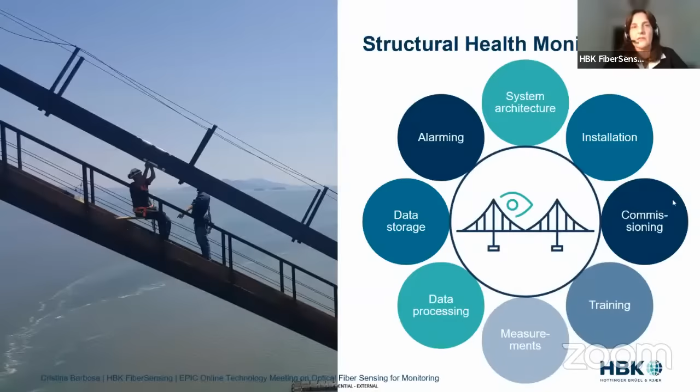So the experience and the portfolio of HBK within all the technologies allow us to cover all these topics in terms of structural health monitoring. And for this, I would like to show you some examples of application.

So starting with an example that is not that recent, it's already from 2017, but nevertheless, this is an important and iconic structure because of its type. So it's a bridge, it's a very old bridge. The whole process and the need for the monitoring system is interesting because they were refurbishing and replacing some of the structural elements of the bridge. So there was the need to monitor its behavior.

So basically the most important part of this rehabilitation process was replacing all the eyebars, which basically are the cables that hang the structure deck. And as they had to be dismounted, all the loads had to be transferred to a short-in-time structure, so a structure just to hold the deck while the works were being done. And all these strain transfers and load transfers had to be controlled real time during that operations. So it was an interesting project in that way.

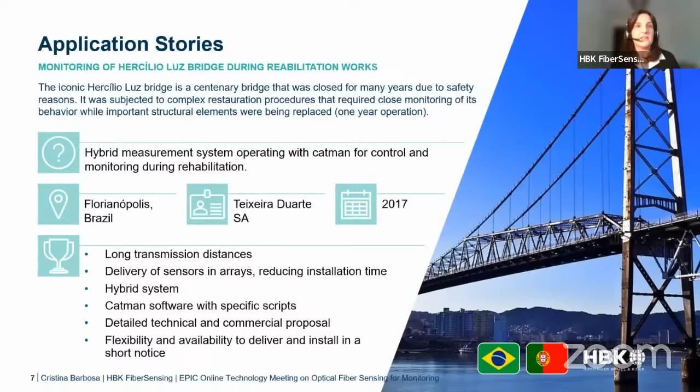And another thing that made this interesting was the fact that this was a hybrid system, meaning that we had the optical sensors based on fiber Bragg grating technology, but also some conventional sensors that completed our solution. Okay, the reason for going to optical technology was the fact that we can attain long distances, and also the installation time was very important.

Another interesting example is a bridge in Venice, a bridge from Calatrava. And here also the optical technology was chosen because of the installation and the fact that HBK could provide the full solution. And last but not least, an example of pipeline, so a penstock that would be filled with water, and that for optical technology is not an issue. So the monitoring of this penstock with strain sensors was also performed by HBK, because we were able to offer the full complete solution, and then also the installation service as well.

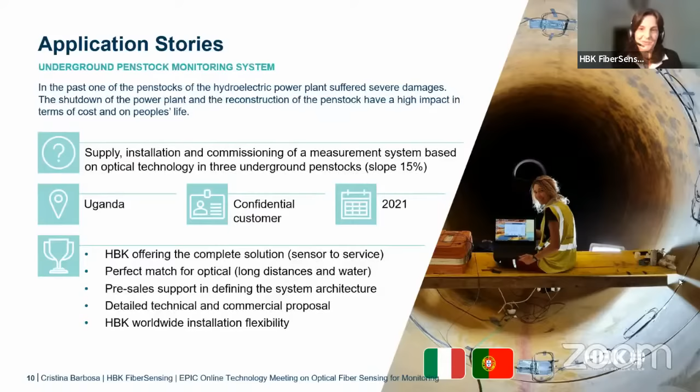So these were the examples and the words I wanted to share with you about HBK FiberSensing and HBK in general. We can go now to the questions.

Thank you very much for your presentation, Cristina. Really interesting to see all your applications. Six minutes is challenging. Yeah, it's really short. I know. Let's go to the questions. That will make it interesting. Yeah. So, do we have any question from the participants? I saw a hand.

Yes, please. Hello, Bolesław Bąk, Sumitomo. I would like to ask you about the number of sensors, strain sensors, which you used in several projects, which you described just right now. What is the scope of these sensors? How many you have used, and what type of interrogator you have used?

Okay, so the number of sensors, of course, depends from project to project. On these that I showed, I had to speed up because of the time. But on the bridge, on Hercílio Luz Bridge, we had almost 300 sensors, strain and temperature. If you are familiar with the technology, the fiber Bragg grating technology requires temperature compensation. So most of the times we use this pair, strain and temperature sensor. On the Uganda penstock, so this was in Uganda, I didn't mention that while talking, but we had more than 84 weldable sensors, also strain and temperature, the same thing.

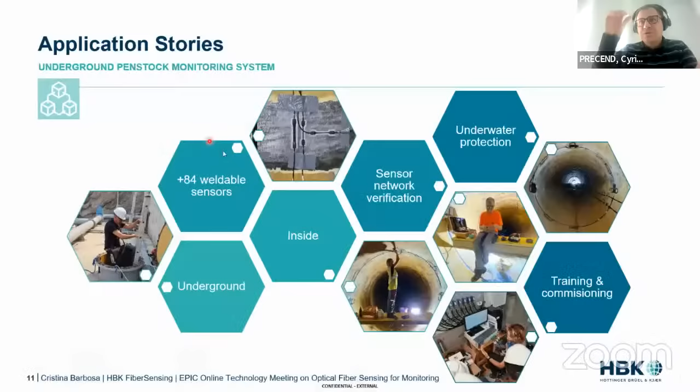So strain are the ones where you see, I don't know if I have a pointer. We don't see your screen, Cristina. You don't? Ah, no, okay. Sorry, I thought you were seeing that. Thank you. Yeah, it's okay.

So these are two strain sensors, and this is one temperature. So groups of three. This is to give an idea in terms of quantity of sensors per project. We are talking about hundreds of sensors. Your other question was on what type of interrogator was used as a device which collects the data from the sensors? Okay. On all these projects, we are using HBK interrogators, FS22 interrogators, depending on the measurement with static or with dynamic acquisition rates.

Okay, thank you very much, Sumitomo, for your question. We have another question from OptiWave, Ahmad Ati. Hi, nice presentation. Question is about what you called the strain sensor. So what's the difference between the strain sensor and another sensor, which is, let's say, mounted on a bridge or something?

On our portfolio, we have many different types of sensors for measuring temperature, for measuring displacement, for measuring load, for measuring vibration, tilt. So those are the types of measurements that we can, okay. So what's the characteristic for the strain sensor? What is it mainly used for, the strain sensor?

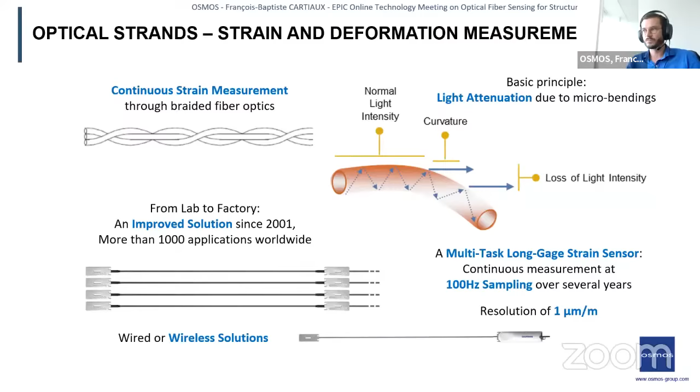Because here we speak about photonics, so the principle of the optical strand, which is our optical fiber sensor, is unlike FBGs or other techniques. We use the modulation of the light intensity in the fiber, and for that we have to amplify the loss of light intensity into the fiber, which usually is not the aim of fiber optics. And so for that we use braided fiber optics. You see a very schematic view here. And every curvature will induce some light attenuation that depends on the tension on the braided fiber, and so on the tension in the material on which the sensor is set. So this is used since more than 20 years on several applications, and we will see one example later.

Here is all the data flow that is managed by OSMOS, so from all the sensors, including the optical fiber ones, through our data logger, either a wired solution or wireless. We also have wireless options for our optical fiber sensors. And all of this goes through internet network to the OSMOS cloud and is available for our customer, both on the web interface for a human user or through API routes for other database interfacing with other systems.

We are also active in the research field of structural health monitoring. Here are a few examples of partnerships with universities. We have four theses, and the main goal of all this research is to know what to do with the data, to turn the data into knowledge. So we are on the engineering level: once we have all the measurements, how can we conclude about the structure?

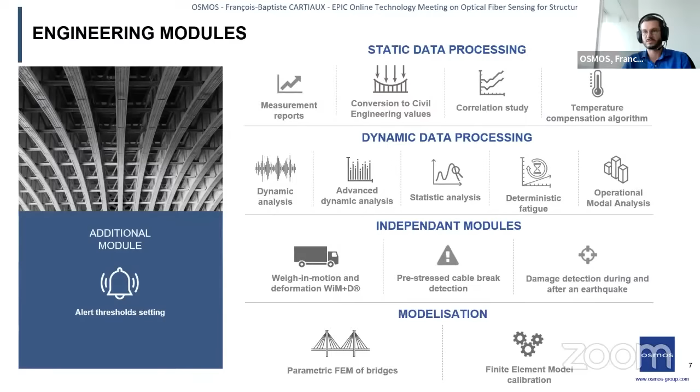Some modules that we use are already available commercially to draw conclusions from the data. Here you see dynamic analysis. Weigh-in-motion is interesting on bridges, so we can deduce the characteristics of trucks driving over bridges from the response of the bridge that we record with our optical fiber sensor. Also everything from vibration analysis, system identification, and so on. And we can also perform model updating when necessary.

Here's my application, so it's only on one slide. We have this example with a reservoir on an industrial site in southern France. It's monitored with 30 optical strands at different critical locations, over the whole height and in two different directions. So we have both the circumferential strain and the vertical strain at different locations.

This is continuously monitored with measurements basically every 10 minutes. And in case of rapid vibration, it's automatically switched to 100 points every second in order to record vibrations of the shell of this reservoir.

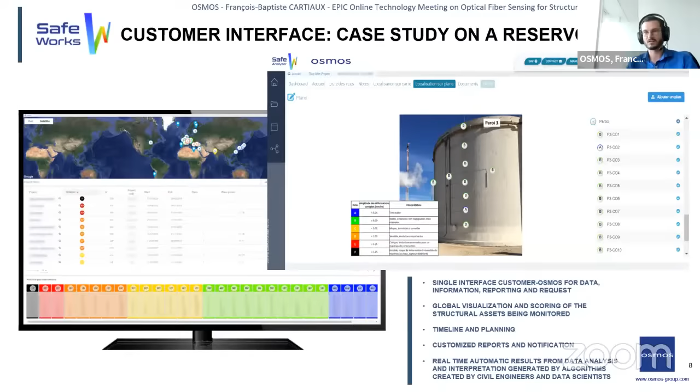I have no time to go into detail, but all the measurements are processed to get this synthetic stability index that we make available to our customer, with a scale from A to F, very easy to understand. The main purpose is to have anticipated assessment. If we see one part of the structure going from A to B to C, it's like an anticipated alert system. We don't speak about alerts because these are very small phenomena at that time, but it's a way to have the kinetics of the evolution of the stability of the assets.

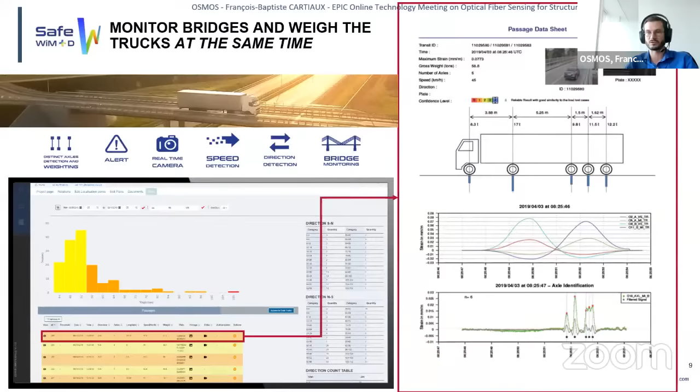Here is a short illustration of another application, very operational, which is weigh-in-motion for bridges. Imagine all of these results for every truck over the bridge, obtained from the response of the bridge measured by the optical strands. And these are our key references. I let you read this last slide, and I am available to answer your questions.

Thank you very much. Sorry, I'm the bad guy. No, I think that's six minutes. It's okay. Perfect. Thank you very much. So we have already one question from Sumitomo, please.

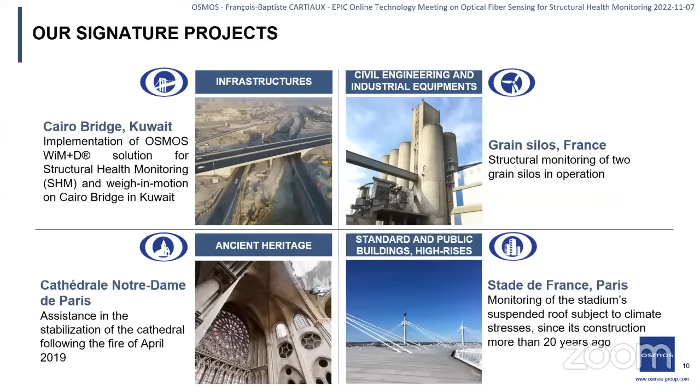Hello. I would like to ask about the details of how the sensors need to be installed on the steel structure. And second, is the sensor itself different from fiber Bragg grating sensors? Yes, I will begin with the second question. You understood correctly. The principle we use is totally different. We don't use the frequency shift due to the gratings of the fiber Bragg grating moving farther or nearer to each other. Here we have classical fiber optics, not prepared with gratings. It's purely the classical fiber optics that you can use for communication.

But we manufacture them by braiding them, and this braiding of the fiber optic allows us to use the light intensity as the indicator for the strain, the elongation of the fiber, and not a shift in frequency or backscattering and other techniques that also exist. The idea of this principle is to have a very light optoelectronic system behind, so our interrogators are not that expensive.

The first question was about the setup and installation. For steel structures, it's very easy. We can install them with magnets, so there's no drilling, because it's totally neutral to magnetic fields. It's easy to install and also easy to uninstall. For concrete structures, we usually drill; it can be a bit different. There is a gluing option: we have qualified a specific glue for a good interface with the material. Thank you for your question.

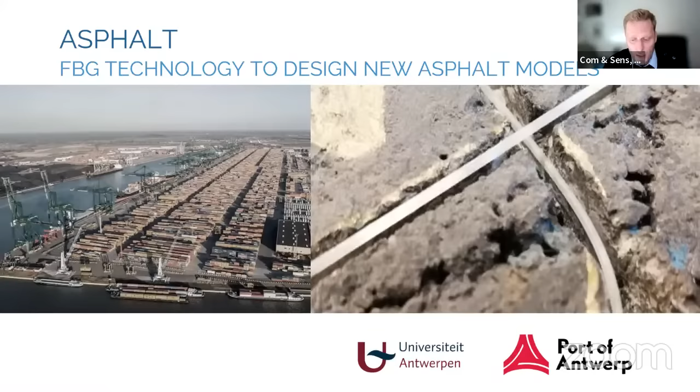So the roads and asphalt pavement at this location are suffering, not a bit, but really a lot. Road deformation is really a big topic, and lifetime extension of existing roads is a big topic. And on the right side, you see a close-up of our composite reinforced sensing tape in asphalt layers, where we install our strip technology into the road pavement.

And we can install the sensors for embedding into the asphalt with different methodologies. They can be placed on geogrids, grooved in existing asphalt layers, or placed together with geogrids. And you see a schematic of a sensor configuration with the road here and the direction of the road, where the trucks, we are mainly dealing with trucks here, the 2 wheels will ride over the different sensor configurations.

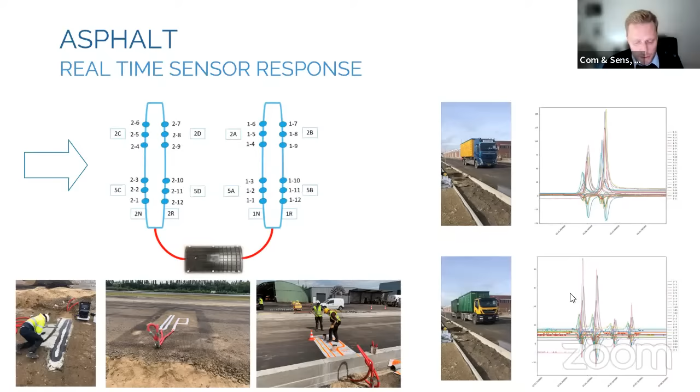If you look at the raw, real-time sensor response with just 2 axles, one single truck, or a truck with a trailer, you see obviously different sensor responses. And based on that, we can go really far into analytics and data processing. When we clean the data and it is processed, we can go really fine into the comprehension of the behavior and the different incidents occurring on the asphalt pavement.

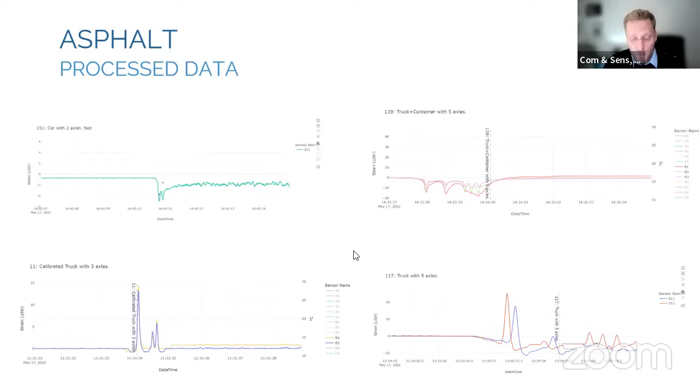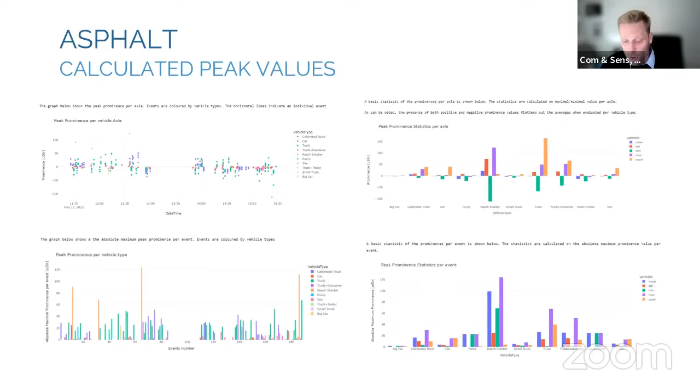So again, the sensors are embedded in the asphalt layers. We can identify a car with just 2 axles. We can identify trucks and containers with different axles, and so on. So really go far in the comprehension of what is happening above the road deck. And then you can run algorithms to define the values you are looking for in terms of analytics, and go really far into understanding the utilization and the deformation of different road pavements. That is one of the projects.

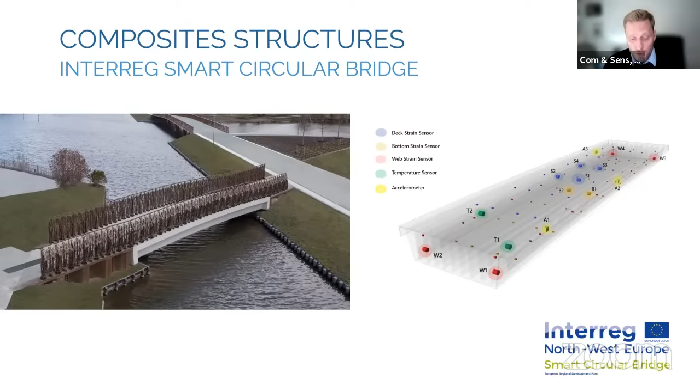Another project, still in embedding expertise into the material: a composite bridge, more precisely a bio composite bridge, based on flax fibers and bioresins, within our collaborative research project in the Netherlands, where we installed the first bridges. One of the features of embedding fiber sensors during production is that we can already give new insights and data for different stakeholders, such as process parameters for the producers, by reading out the sensors during the process.

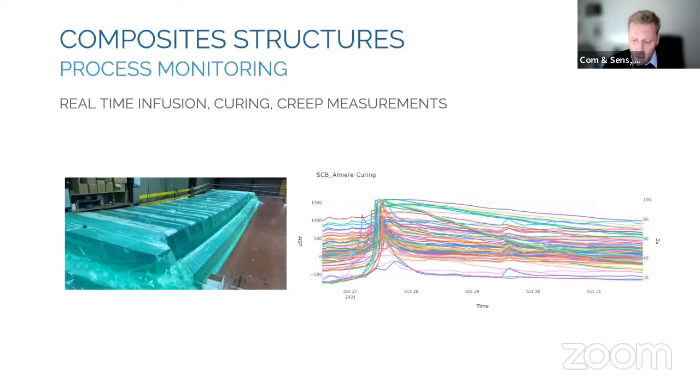You see a plot here of curing, monitoring the different strain and temperature sensors embedded in the material during the curing process of the composite bridge, giving more insights for the producers and providing, in fact, a digital quality fingerprint of the production leaving the factory. Afterwards, using the same set of embedded sensors, you can validate the parameters that you took for the design.

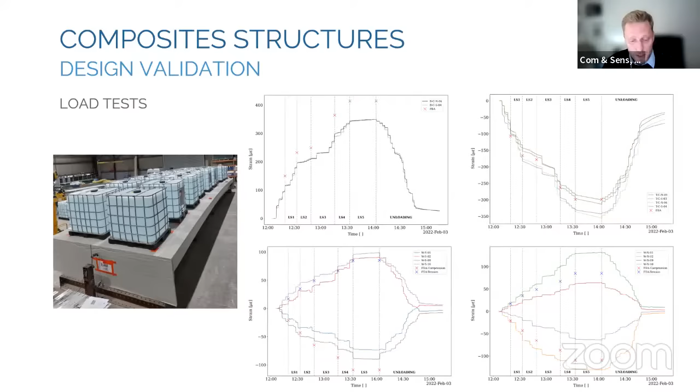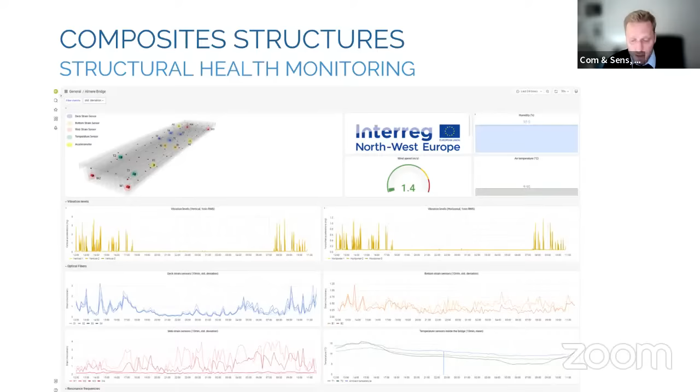Here we are talking about biocomposites, so new materials, trying to understand their behavior, and already using the sensor data for validating your parameters during a factory acceptance test or load test in this case. And then obviously using the same set of sensors for structural health monitoring. This is a print screen of a plotting tool for this bridge, where you can dive into different sensor responses and into more analytics of the usage of the bridge.

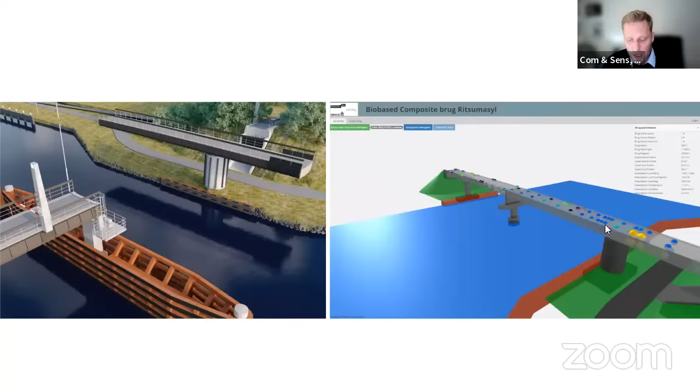This is another print screen of another bridge we did, also a biocomposite bridge, but this one is movable, with more than 200 FBG sensors embedded into the material. And you get here a print screen of the dashboarding, where you see live the values of the strain and temperature sensors. And this is what Com&Sens does.

The scope of Com&Sens goes from understanding the needs of the customer, why we need to monitor the structures, up to engineering the sensor configuration, installing the sensors and data acquisition hardware, and all the data handling from acquisition, management, transfer, processing, analyzing, up to providing dashboards from the live structures. It is my short pitch from Com&Sens, and we believe Com&Sens makes sense.

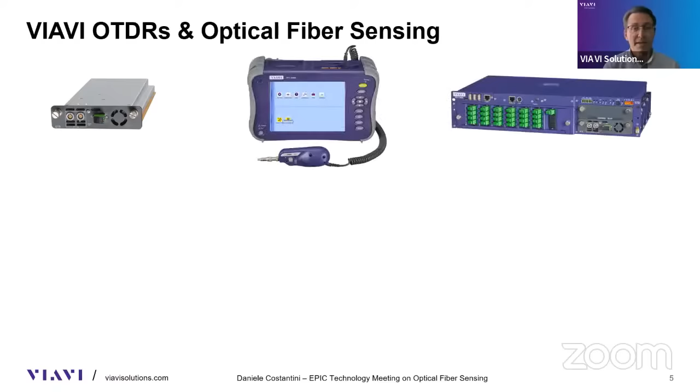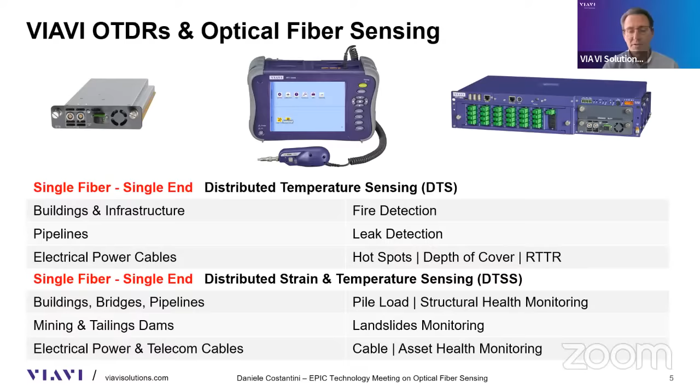All our OTDRs are very modular in nature, so each optical engine or fiber test head is made to fit handheld instruments or rack mountable platforms. And this modularity is very appreciated because it gives flexibility in the design of sensing solutions, going from fire detection in smart infrastructure all the way to health monitoring of telecom cable assets, which is the topic of today's talk.

So maybe one first message is that normal standard OTDRs used nowadays in the telecom space are not able to pick up this specific data. So Brillouin OTDR is the perfect tool for picking up and assessing the health of the cable itself.

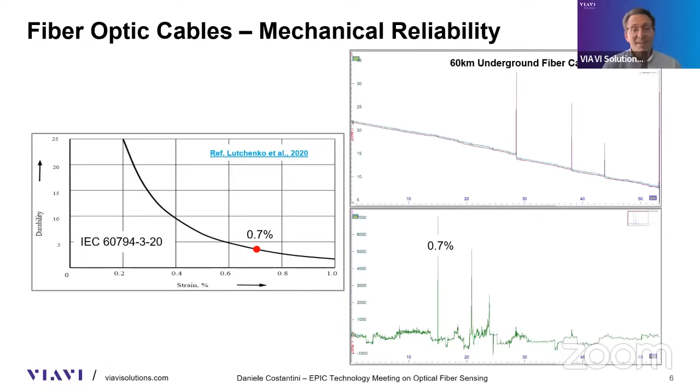For this specific cable, 0.7% we measured means that at that point, we had more than 7,000 microstrain of strain. And as you can see from the model of Lutchenko, for that cable, we could expect a lifetime lower than 5 years. So first message was, okay, we need a BOTDR to assess the health or the quality of the installation of the cables on the network.

Second question is, which BOTDR? Or what are the characteristics that are key for BOTDRs to do a good job? And so ideally, the good BOTDR for this topic is one that is able to decorrelate or measure at the same time strain and temperature.

On the graph here, we see traces that we have been taking on a 60 kilometers underground line, 6 measurements over 6 consecutive days at 24 hours of distance from each other. And if we are not able to decorrelate or get the temperature compensated strain measurement, we end up with a question: is this just strain, or what are the effects of temperature?

So our Brillouin OTDR is able to measure both strain and temperature by accessing one single fiber on a single end, and it doesn't need specific cables. And this is typically the situation on optical networks that are not made for sensing, but are made for data transmission. So the BOTDR that we offer here is able to measure at the same time strain and temperature using a single fiber.

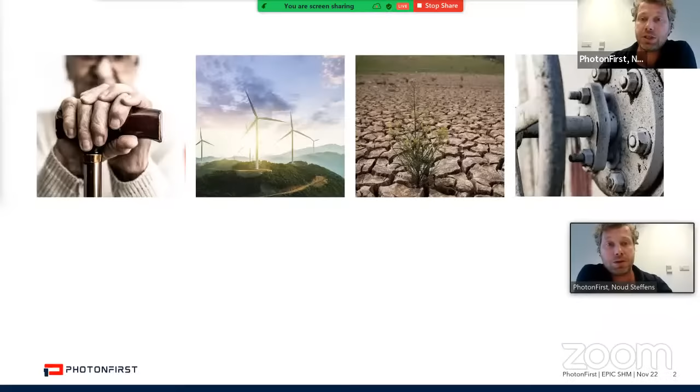My name is Noud and I'm responsible for the development of the energy and infrastructures market at Photonfirst. I'm going to present today why further integration of optical components is critical for the use of fiber optic sensing at scale, which we believe is required for a safe and sustainable future. In an increasingly complex world, we identified 4 macro trends. We see an increasing aging population, the amount of people available is reducing and knowledge is disappearing. This drives the need for automation.

Second, the energy transition. It's important that we get the maximum out of our energy production and energy network. Third, climate change and sustainability. This drives the need for better use of our resources and more robust assets. And finally, there's a huge amount of aging assets, and the expected amount of work for maintenance and replacement of assets is higher than we can currently execute in the coming years. Therefore, careful planning is required.

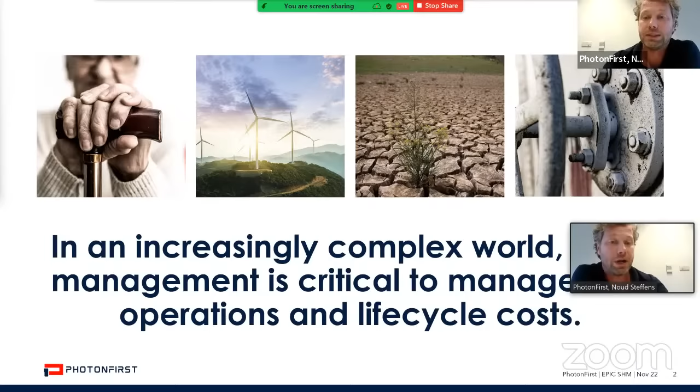Next to these macro trends, we see a few technology drivers. 3 important trends are enabling the monitoring of assets at scale. First, computational power and AI. This allows for better and faster decision-making from complex data. Second, connectivity: fast data transmission from all corners of the world. And finally, more advanced sensing solutions. This enables higher quality data from the assets that we want to monitor.

Of course, it's all about making informed decisions along the life cycle of the asset, and we need to make decisions about the design, maintenance, and end of life of assets. It is important to realize that most of the cost, about 2/3, goes to maintenance and end of life. So actually the biggest part goes to the operational part of assets, and information about this part is not widely available yet. And this is where we need to make the most critical decisions in the coming years.

To enable better decision-making along the life cycle, we need to address 2 important aspects: the quality of the data, driven by new and advanced sensing technologies, and second, smarter decisions supported by new, potentially AI-based algorithms. At Photonfirst, we focus on the quality of data. Photonfirst develops advanced integrated photonic sensing solutions that allow for use at scale. So we aim to provide high quality data with integrated photonics sensing solutions to enable smarter decision-making at scale.

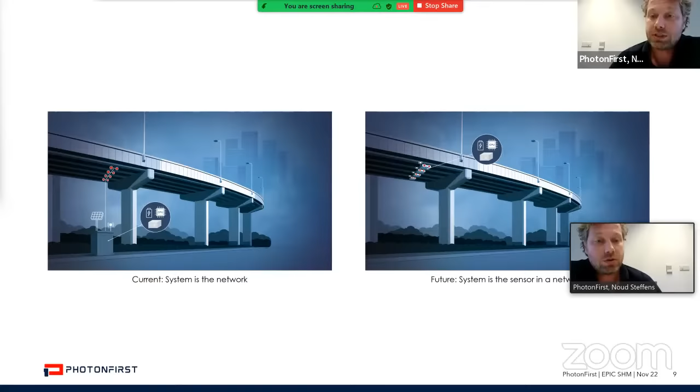This, of course, is very much application specific and the exact use will differ per application. What we aim for is the adoption of fiber optic sensing at scale. So currently with conventional technologies, we do it like this. And in the future, we aim at increasing the reach of fiber optic sensing over, for example, the Netherlands.

Concluding, there's a need for more advanced sensing solutions with better monitoring to reduce the total cost of ownership during the life cycle of an asset. Integrated photonics will push technology progression and will allow for further cost reduction, simplifications and widespread use of advanced sensing solutions. Main drivers to increase acceptance are application-specific solutions with maximum flexibility and minimal installation times.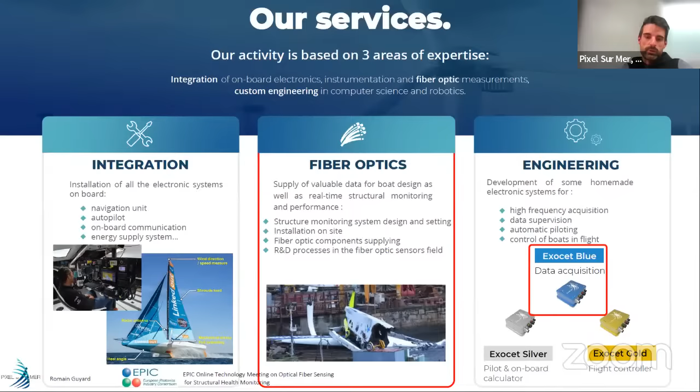And I work for the third business unit, related to structural health monitoring applications with fiber optic technologies. Our duties are to design, to decide which features of sensor we want to install on site, and to supply fiber optic components as well, like optical fiber patch cords or sensor connectors, and we have a few R&D activities as well.

And we equip essentially sailboats, but not only. I can show you a few of them: for the America's Cup, for the Maxi Ultime, or IMOCA boats. Why SHM? Why structural health monitoring? There are a lot of applications, but I can show you four of them.

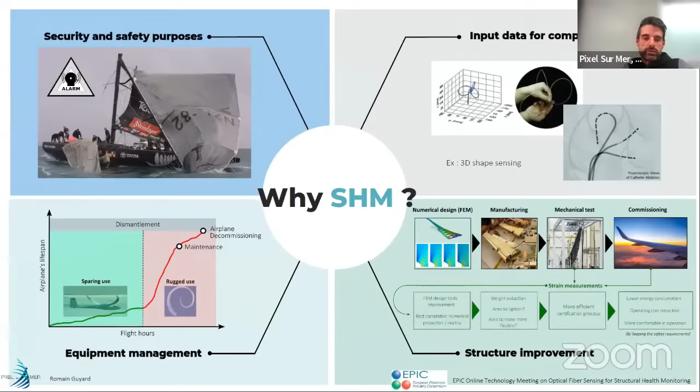Security and safety purposes: it's just to notify a crew or user when something wrong is about to happen. And we can use the data, the strain measurement, for more complex applications, such as 3-dimensional shape sensing. We can use strain measurement or temperature measurement or other parameters to improve the structure, for instance to make them lighter in the future, or to have equipment management.

I think you know what optical fiber is, but it's highly compact and it's very suitable for harsh environments. And we use it as well because it's a very, very accurate way to measure strain on the structure. And we can put them in series. It's not the case with other technologies like resistive strain gauges. That's why for some applications it's very practical.

There are several technologies of fiber optic sensors. The first one is the distributed family. Most of the time, this kind of technology uses optical scattering within the optical fiber. It's very suitable to measure strain or temperature on very big structures.

Okay. So we use quasi-distributed fiber optic sensors, and in that case, we cannot measure strain continuously along the optical fiber, but only at specific locations. Fiber Bragg gratings, very quickly: it's very similar to a mirror, but you filter the light as well. So when you launch light inside the optical fiber, you get a reflected peak, and we use the reflected peak to measure strain.

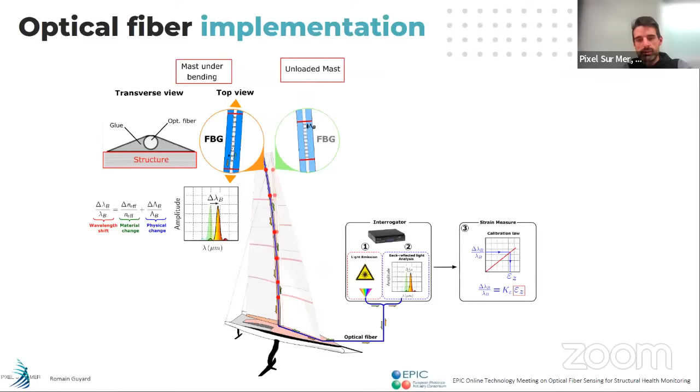So when the fiber on the structure gets deformed, it changes the wavelength of the peak. And by measuring this wavelength shift, we can deduce the strain inside the structure. We can use several fiber optic sensors by doing wavelength division multiplexing, with gratings at different wavelengths.

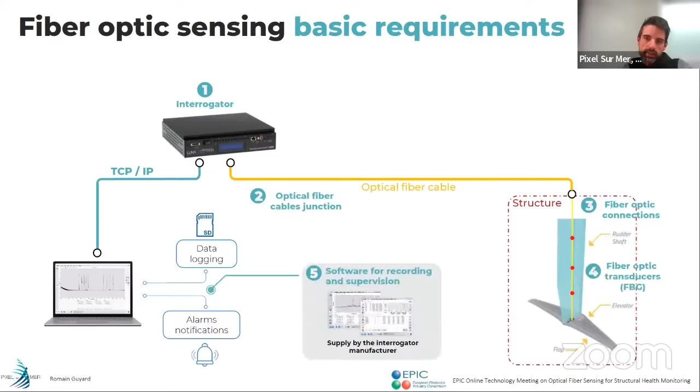And so to be very quick, a basic installation is an interrogator. We need to use an interrogator to launch light and to analyze light, a cable junction, fiber optic connectors, conventional or watertight connectors. We can embed the fiber optic sensor within the composite material or on the surface. And we need software for recording and data acquisition, and most of the time it's supplied by the supplier.

But for our installation, we make a more complete installation. We add the Exocet Blue. It's a kind of black box, and it's very practical because you can synchronize sensors from different kinds of sensors on board. You can set a few alarms. You can log your data, and you can export your data to the cloud. It's very easy to configure. You don't need to be an expert in computer programming.

And so you have a very nice dashboard, and you can see your plots very easily. You can compare your plots from different sensors.

We use an interrogator from Luna because we have a very wide spectral range, a very wide wavelength range. That's why we can install a lot of fiber optic sensors. But in the future, I think it's very essential to make this interrogator lighter and thinner. I think by using silicon photonics, it will be possible.

Thank you very much for the invite and the possibility to talk today about what we are doing as a company. My working title is FBG Sensing in Structural Health Monitoring, and my pitch for today will be closing the gap. I will show you in a bit what I mean with that. I think most of the participants might know us. FBGS is one of the pioneers in fiber optic sensing. We are a developer and manufacturer of fiber optic sensing components, and we also develop tailored solutions. What makes us a bit special is that we start from the raw materials, so we produce and draw our own optical fibers.

We have different processes to produce sensors, mainly FBGs, and then we take these FBGs for certain applications like temperature, shape sensing, strain sensing, force sensing, and pressure sensing, and bring them into tailored optical solutions for various markets: medical, process industry, transportation, energy, and of course also the civil engineering market. We are located in Germany, Belgium, and have also offices in China and North America.

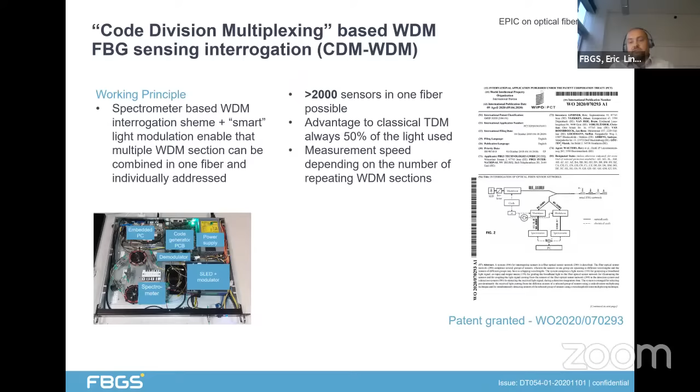Of course, those things have been tried in the past. But in comparison to classical TDM measurement technology, there you divide your optical power by the number of TDM sections you have. Here, due to the code division multiplexing, we are always able to use 50% of our incident light, which also gives us gain in speed, as you will hear later on. All the technology is patented, and how it works today is that we use a broadband light source with a modulator, and then we design the optical fiber, which is also produced by us, with multiple thousands of FBGs and WDM sections.

Section 1 can have different numbers of sensors. The wavelength configuration within a WDM section is freely selectable, and we can address each individual sensor even in a chain of more than 1,000 sensors in a line. If we say we can interrogate up to 40 sections with up to 50 FBGs per section, we come to that number of 2,000 sensors in one line. It's hard to visualize in such a short period of time, but we tried. What you see is a color plot of actually 1,889 gratings.

And what we visualize here is that somebody is holding their hand next to a fiber spool, and you see that a certain number of gratings are starting to get hot. And if you calculate the distance between the hot spots, you can even calculate the circumference of the spool which we use. So it's really a measurement of 1,800 sensors.

On top of that, if we synchronize to a certain section inside the optical fiber, here, for example, we synchronize at the end, and we especially synchronize on sensor 1,879. And if we synchronize on that sensor, we can even increase the measurement speed up to the kilohertz. Here it's probably a little bit less, but we can really then measure, if we synchronize to a certain section, really, really quick.